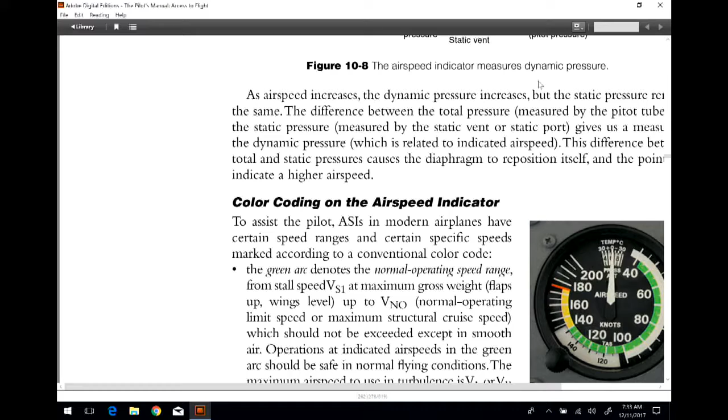So for instance, when we look here at the green arc, remember the green arc here in this... can I get that a little larger? How do I do that? Hang on, zoom. I don't want to do it that much. That's going to be just a little much there, I think. Yeah, dang it, I'll fix that later. I thought I could zoom in on that, but I can't, can I?

Just remember that the green arc, anytime that you see that on an airspeed indicator, refers to VNO, which is going to be your maximum structural cruising speed. It is the normal operating range with your aircraft in a clean configuration.

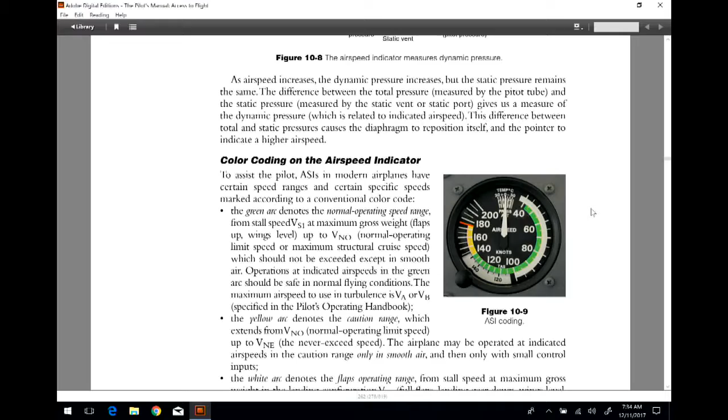However, it's just not as easy as saying VNO is the normal operating range; it is the structural cruising speed. So the thing you're going to have to learn is all of those V speeds. You have a chart down there that shows you those V speeds, and I think I showed that to you one other time. You're going to need to know what those V speeds stand for.

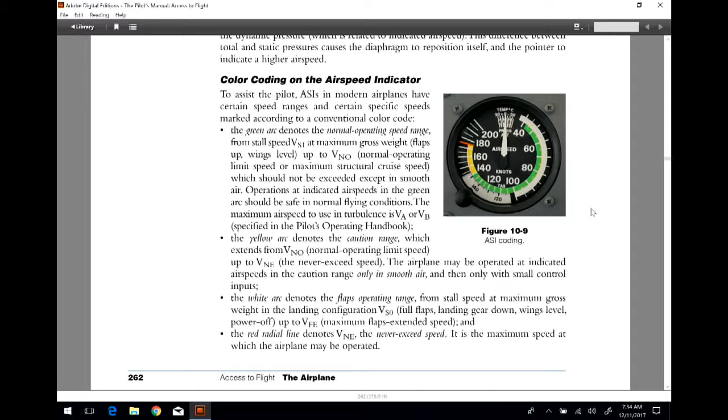So what VS1, VSO, VNO, VNE, also VA — or depending upon which aircraft you're flying, something called VO. It's going to be something that we call maneuvering speed. Maneuvering speed is that speed at which, when we start getting bounced around in the airplane, this is where VA comes in.

So in the mountains, clearly, we're going to have some turbulence occasionally. When that happens, and it starts to get just a little bit beyond the mild burble you get when you fly, when you start getting bounced around the cockpit, you're going to need to slow that airplane down. The reason you want to slow it down is because if you get a real big gust one way or another, it can put excess structural loads on that airplane, and when that happens, bad things can happen.

So slowing that airplane down gives you a greater margin of safety with regard to the structural integrity of your airplane. Oh my God. Structural. Stand by. Structural integrity of your aircraft. Goodness.

Slowing the airplane down will allow you to fly at what we call VA. The reason VA is not indicated on your airspeed indicator is because it is wholly a function of the weight of your aircraft — the heavier you are, the higher your VA indicated airspeed is going to be. Remember, VA is what we call maneuvering speed. Cirrus calls it VO, which is like operational speed, but Cirrus kind of does their own thing with stuff anyway.

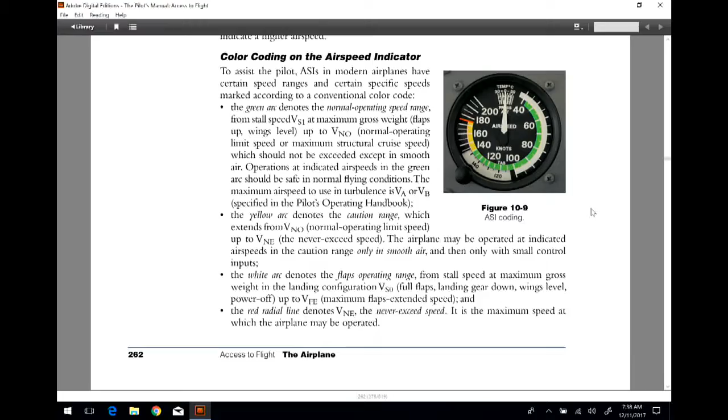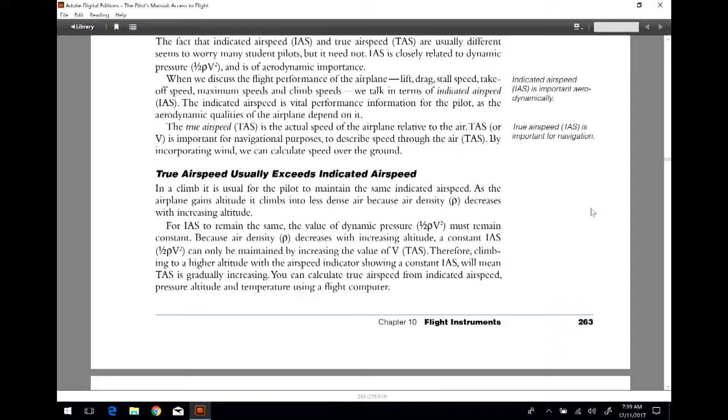We're going to go down here and look at some of these other things. I'm going to blow through the things we've already talked about: indicated airspeed and true airspeed, we've covered that. I'm going to go through this here also.

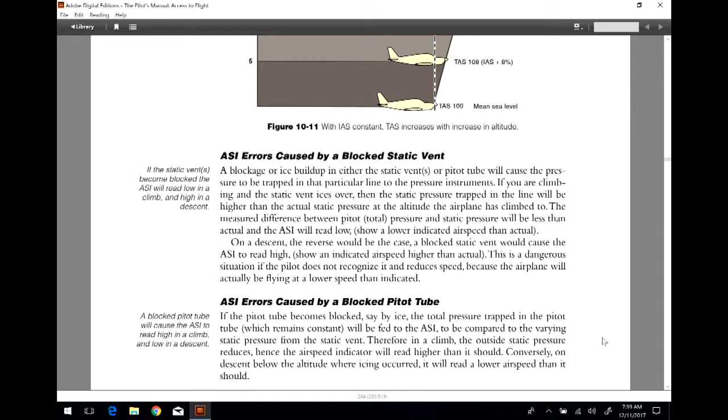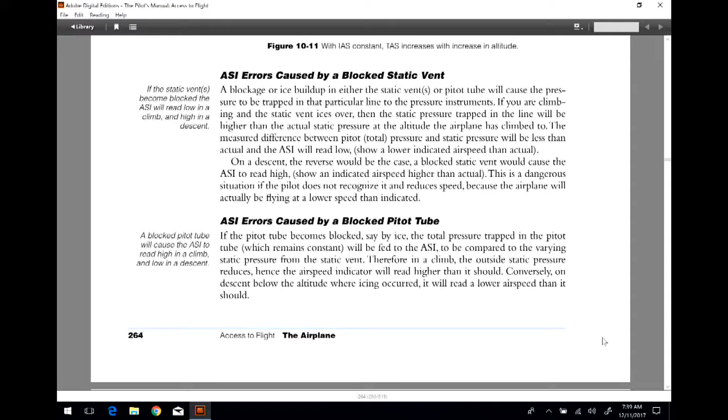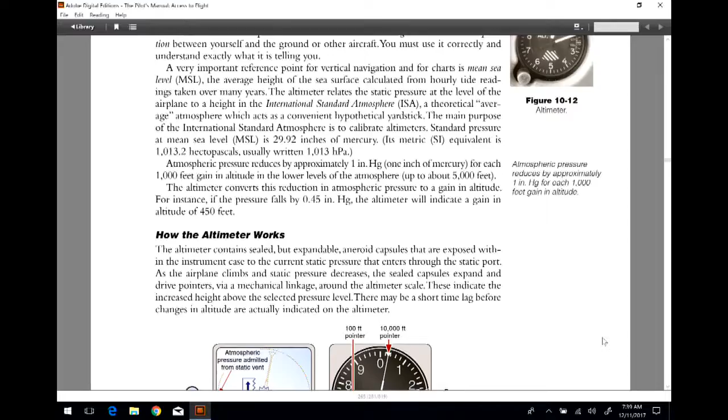Know what the errors are for your instruments, know what they're caused by, and make sure you know those. The altimeter - know how it works. Oh look, there's how it works. Know what the hands mean, know what they are.

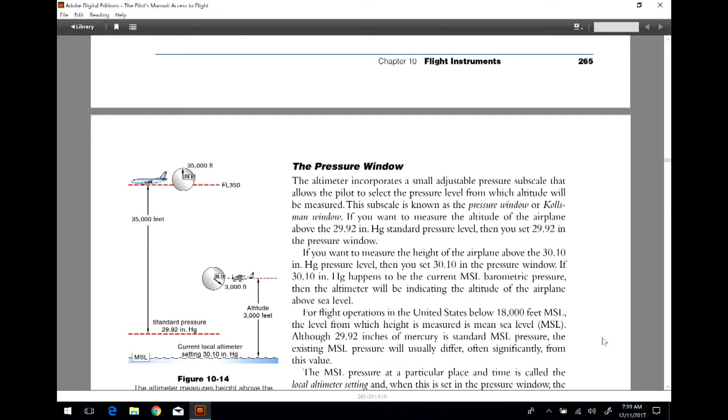The pressure window - and by the way, I misspelled Kollsman. I said K-O-H-L, I think I was thinking of Kohl's, like the retail store. It's K-O-L-L-S-M-A-N.

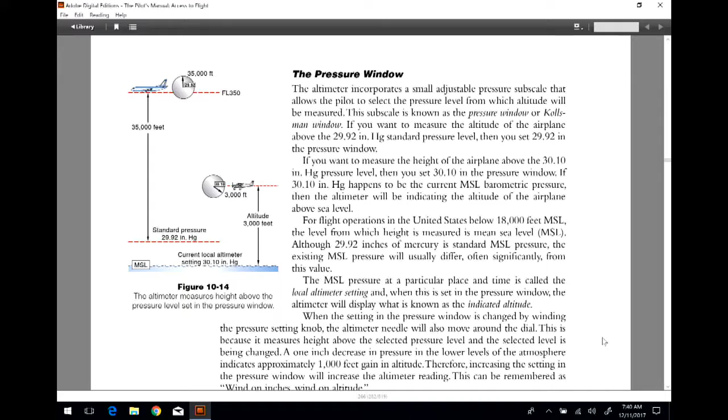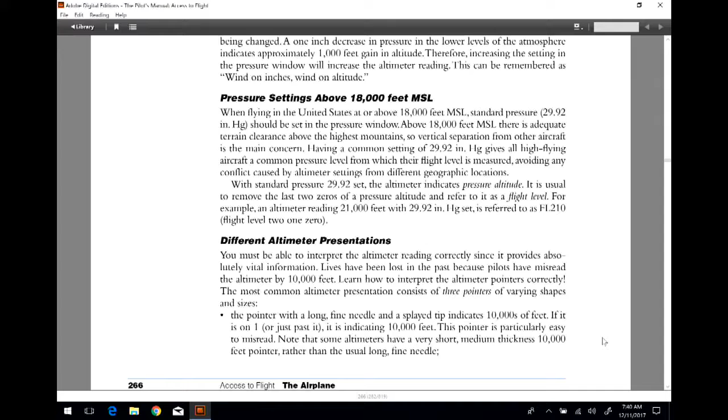Also know that we turn our altimeters to 29.92 when we're at or above 18,000 feet MSL, or what we refer to as flight level 180. The reason we do that is to put everybody on the same sheet of music.

When you're above 18,000 feet, guys, I'm having a rough morning speaking this morning here - so, 18,000 feet or flight level 180. Again, the reason we do that is because when you get above 18,000 feet, you're not going to hit anything. We're above all the mountains in the lower 48, and above all the towers and other stuff, so we're not going to hit anything up there.

And the problem is, remember me telling you that flying in the mountains, if you go more than about 10 minutes without changing your altimeter setting from another airport's reading, you should start getting a little twitchy, because it changes quite a bit. In Iowa or Kansas or somewhere like that, you may not have to change it as much, but your weather, especially air pressure, changes quite a bit in the mountains, primarily because of the orographic nature of the air as it moves over and around them.

So that pressure changes quite a bit, and you need to change it often. If you did that flying over these things at high airspeeds at flight level 180 and above, you'd basically have a guy just sitting there twisting that knob all the time, and that's just not practical. So to put everybody on the same sheet of music, 29.92 - that's it. We take the little variations we have flying through the air mass, because as long as everybody is on that page, the aircraft altitudes will all stay together.

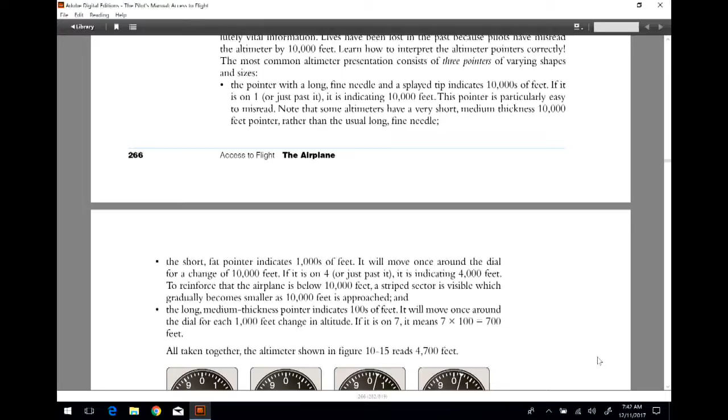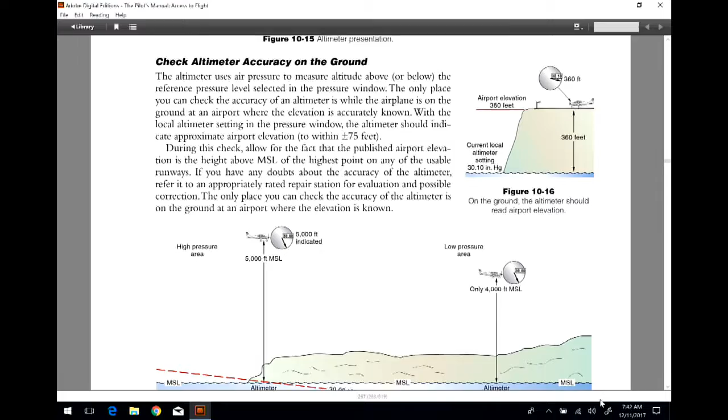All right, there's more presentations of this. Check the altimeter accuracy on the ground. Normally, what should happen is that when they give you the altimeter setting, like in Aspen, you should be within plus or minus 75 feet of the published altitude for that airport with that given altimeter setting. So you need to check that also.

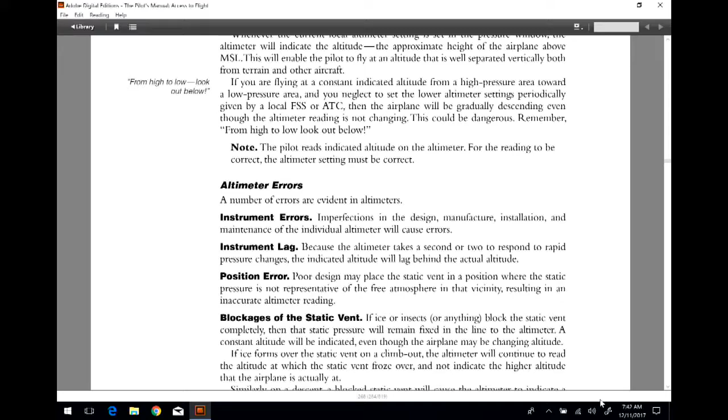Now, they call these things altimeter errors, but this really is not an altimeter error. Think about what I said about flying at flight level 180 and above, and how we take those little given changes in the air masses with regard to pressure. That's a little tougher to do when you're closer to terra firma, especially in our part of the world. So keeping that altimeter setting correct for your specific locale is extremely important.

Because if you think about the way an altimeter works, with higher pressure, that little squeeze box inside is going to get smaller. With less pressure, it's going to increase. So we have to think about this flying from one air pressure mass to another. And this is where they come up with the expression, high to low, look out below.

Because what will happen is that if you do not change your altimeter setting and you fly from an area of high pressure to low pressure, your actual altitude will be lower than your indicated altitude. You will think you're up here, but actually you're down here. And that could be catastrophic, especially in our part of the world.

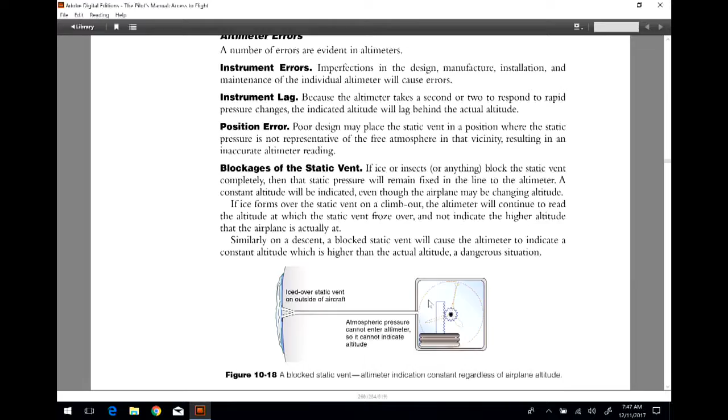You can look here, find out what happens when you have static vents blocked. Remember that you also have an internal alternate static source inside the airplane, so that in the unlikely event that your pitot tube and your static vents all become blocked, you can open those lines up at least inside the cockpit, and that's going to help you.

I'm still showing live here. I'm sorry guys, I'm just looking down at this thing and I'm not sure why it's doing this, but I'm showing that we're live. I am praying that that's the case. I hope we have not lost our thing here. Yeah, thing, that's pretty articulate. I'm looking here guys, and again I'm looking at this thing, and I don't know why it's searching for devices on this network. There it is. It's still showing that it's live, so we're just going to pretend that it is.

Yeah, so there's that. I don't have a good place to put that. Shoot. All right, isn't this fun?

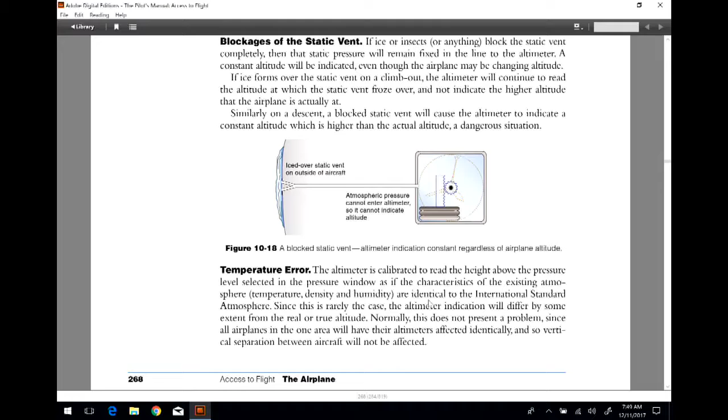In the unlikely event that the static lines get all blocked up, you can still open up those static lines inside. Now that's not going to take care of your pitot, because your pitot tube is outside, and you should have turned the pitot heat on prior to entering any visible moisture. And visible moisture, of course, is called a cloud.

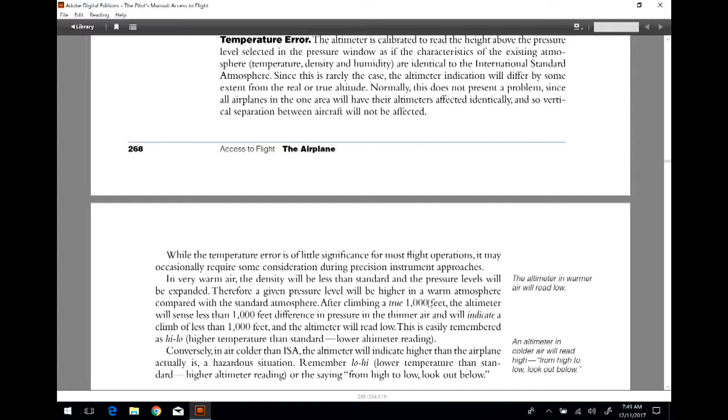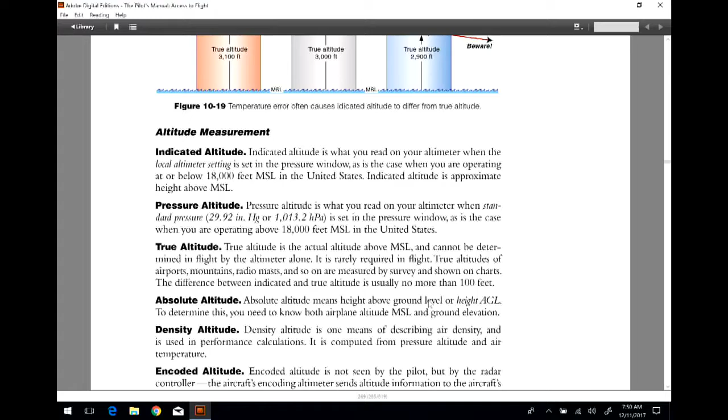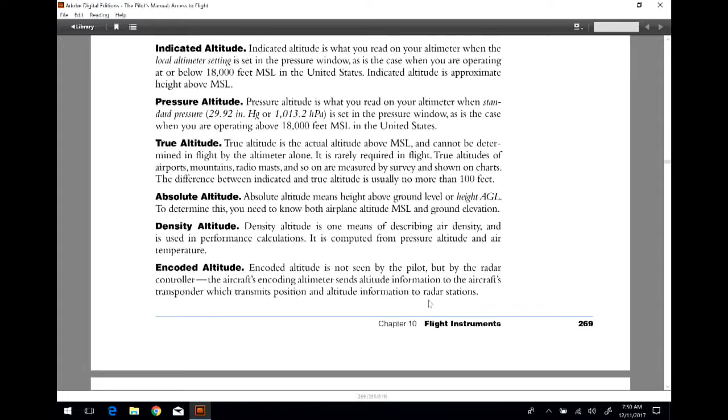Temperature errors: when we look at this, if you think pressure can cause a different reading, you would think temperature can too. Where temperature really comes into play has to do with really, really cold weather. And that cold weather is also why we have a special advisory for operations into airports where the temperatures are really cold. When we get to the instrument side of things, I will show you that and why that works. But understand how all of that stuff plays out.

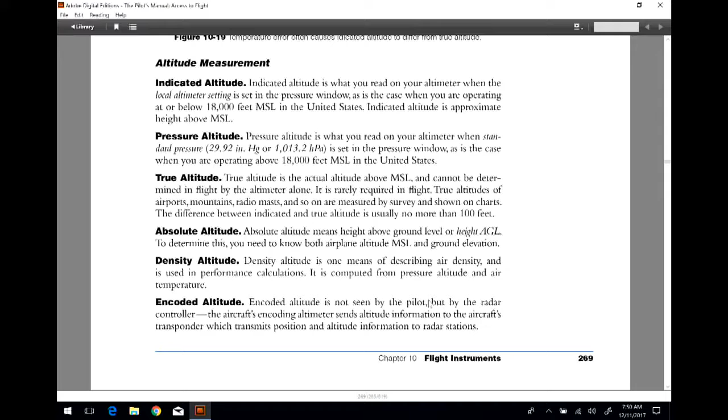Understand your altitude measures. Know what indicated altitude is, pressure altitude, true altitude, absolute altitude, density altitude, and encoded altitude. Know what those are.

Vertical speed indicator, as the name implies, gives you an indication of the rate of your vertical speed, whether you're going up or down. And it works similar to an altimeter, with one exception.

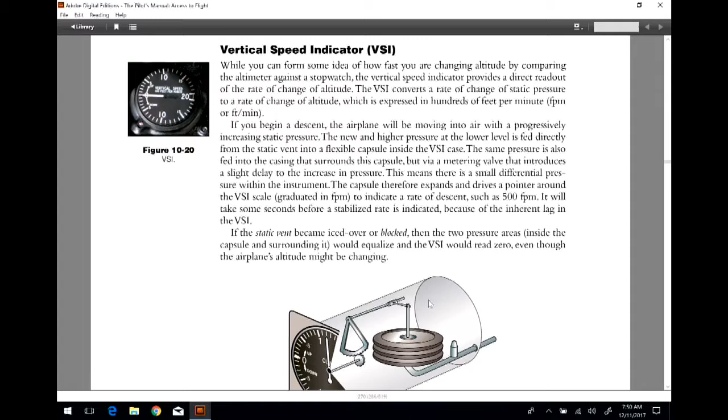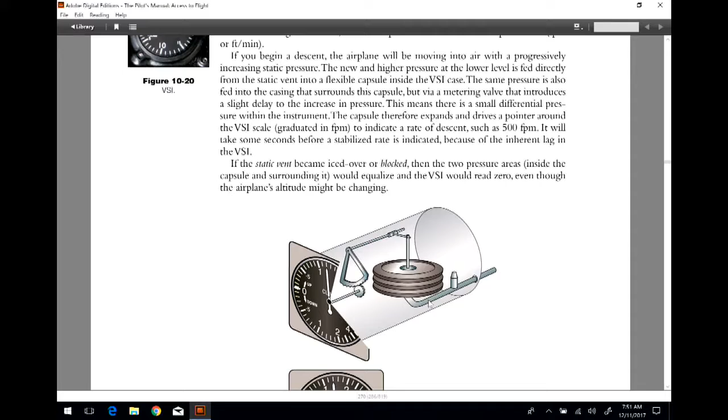The altimeter has a closed case with the static lines connected to the back. The vertical speed indicator has in the back of the case a teeny hole, a little bitty hole that creates what they refer to as a calibrated leak coming out the back. Without that little hole, you'd essentially have two altimeters, and while two altimeters may not be a bad thing, it's not going to give you a measure of your vertical speed. That little hole creates a delay that shows you when you're climbing and by how much, or when you're descending and by how much. So that's what the vertical speed indicator does, along with that calibrated leak.

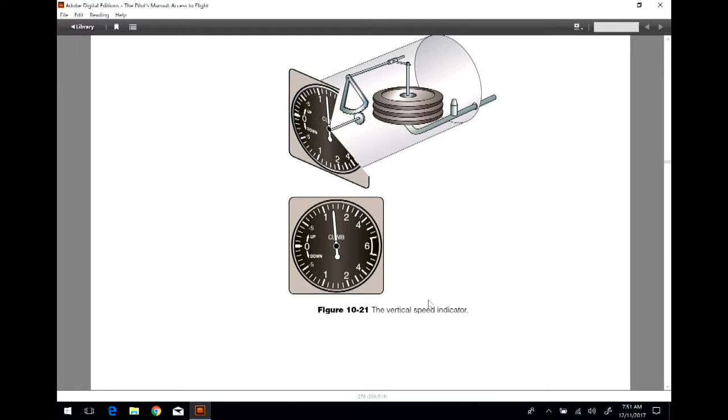Now, let's say all of your static lines become blocked, your pitot heat is blocked, your pitot tube is blocked, and your alternate static doesn't work. You just wrench the handle off of it or something, who knows. What would you do? You can't open up anything. Here's what you do: you break the glass of your vertical speed indicator. Think about it. If you don't have a sealed case, you're opening up this vertical speed indicator to the ambient pressure inside the cockpit. Your vertical speed indicator is not going to work, but what would you rather have, an altimeter or a vertical speed indicator?

I'll take the altimeter, thank you very much. And the reason you break the glass on that is to open it up to the pressure inside the cockpit, and it is the least expensive of the pressure instruments to replace. So that's why you break that one. So in the event of emergency, break glass.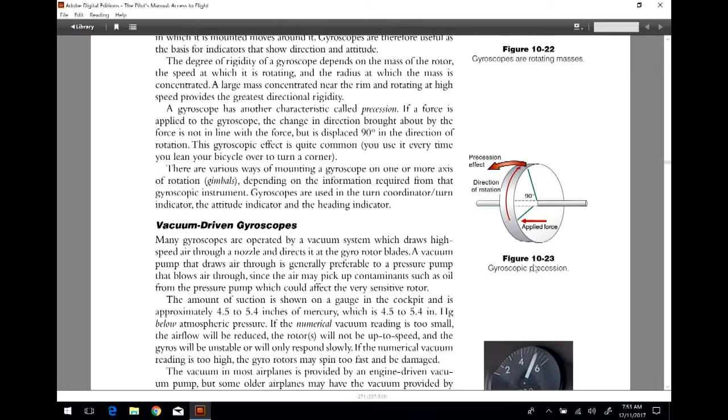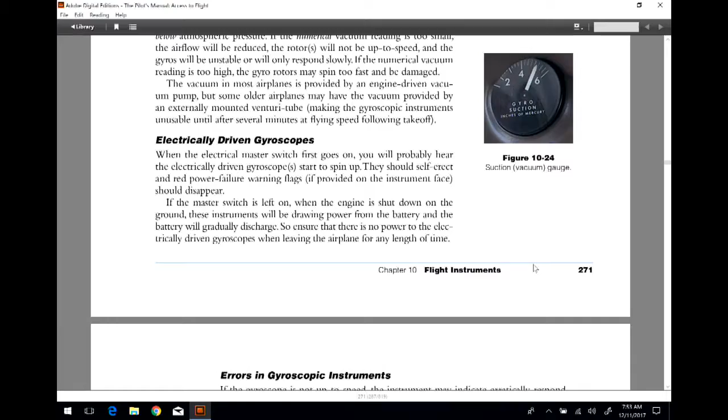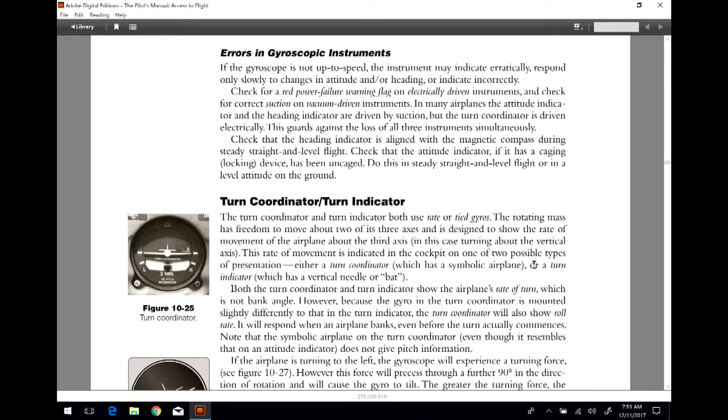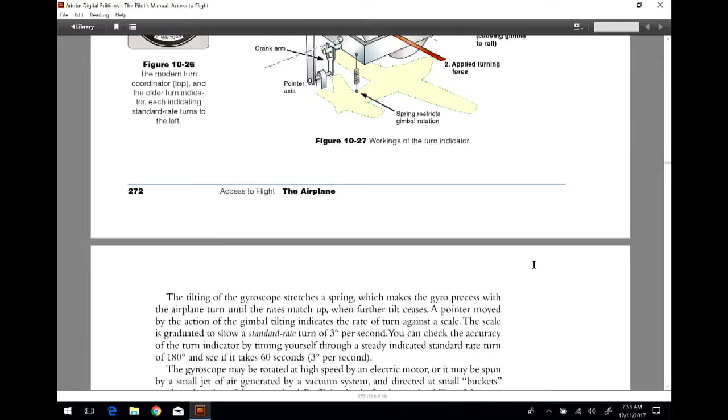Most of the older ones are driven by vacuum pumps, which blow air over the vanes on the edges of that thing. A lot of them now are electrically driven. The big thing has to do with failure of that thing to keep spinning. Once it's spinning, it's going to show correct instrumentation. But if you have a power failure or a vacuum pump failure, that thing will ultimately start to spin down or begin to slow down. When that happens, the indications on your gyroscopic instruments may be faulty. So that's kind of how that works. You can look there at your gyroscopic instruments, you'll see what that's all about.

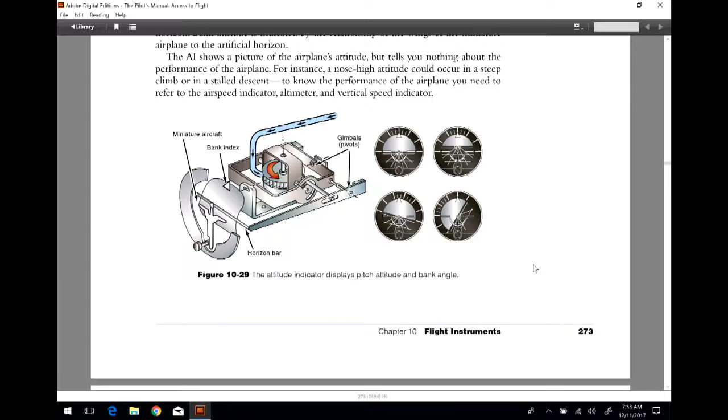What is the alpha and the omega? Oh, that is correct, it is your attitude indicator. Understand what the attitude indicator does for you. Understand how it works.

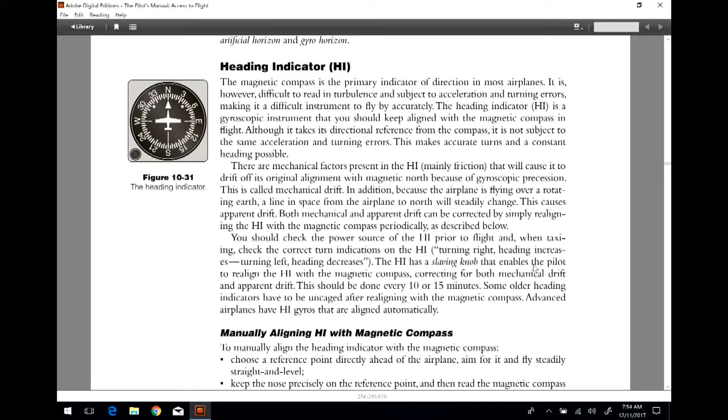Heading indicator - that's another gyroscopic instrument. Understand how that works. Know that periodically, we used to have to, every 10 to 15 minutes, manually change the heading indicator because it wasn't an electrically driven instrument, so you'd have to slave it to your actual wet compass up on your glare shield somewhere. Normally they mount those away from your other instruments so the electronic fields don't interfere.

The new ones we don't have to do that with because they're electrical, driven by the computers, and they also pull data from other sources. So that's how that works.

Also know that whenever you have navigation information overlaid on top of your heading indicator, we call that an HSI, a horizontal situation indicator. HSI is navigation on top of your heading. Okay, so there's that.

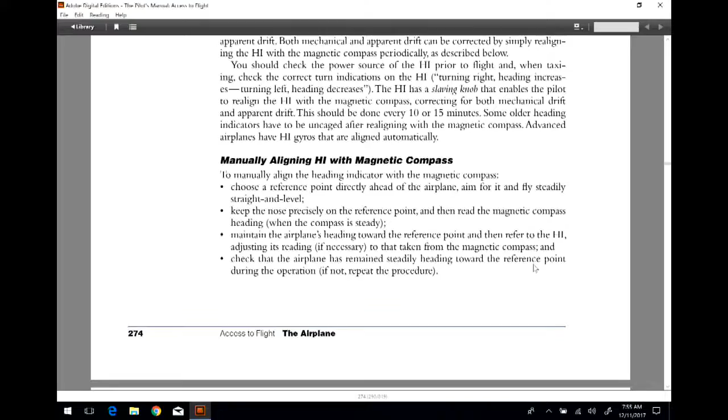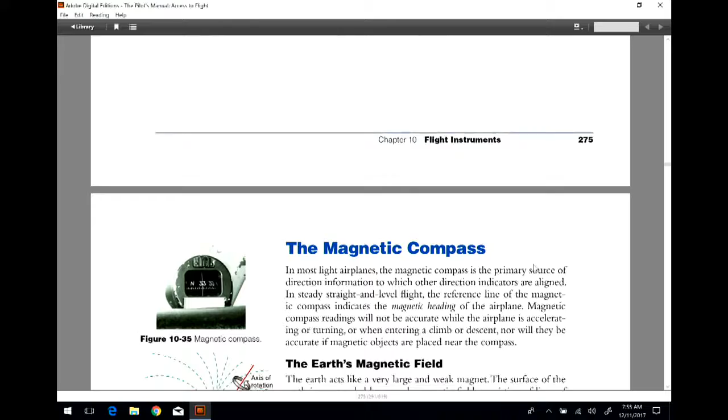And this, the inclinometer, turn coordinator - you know how that works. Look at this, know that all of that stuff works. The magnetic compass - this is the wet compass, or the old whiskey compass, as we talked about before.

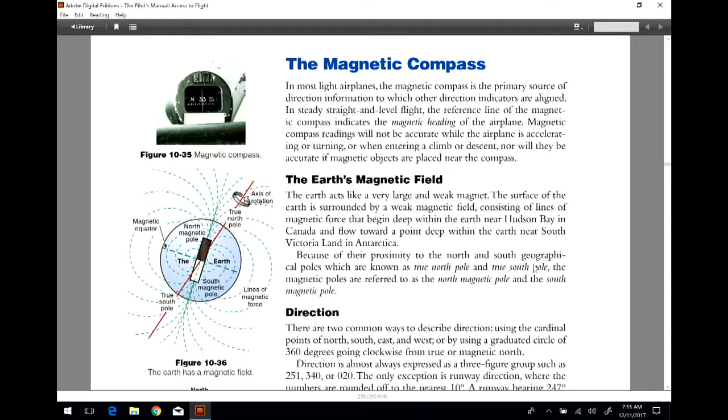We use the magnetic flux - these isogonic lines around our atmosphere, which, by the way, the magnetic field around our Earth is why we have an atmosphere. So for right now, most all of the things we do are based on true north and magnetic north, using our magnetic field here.

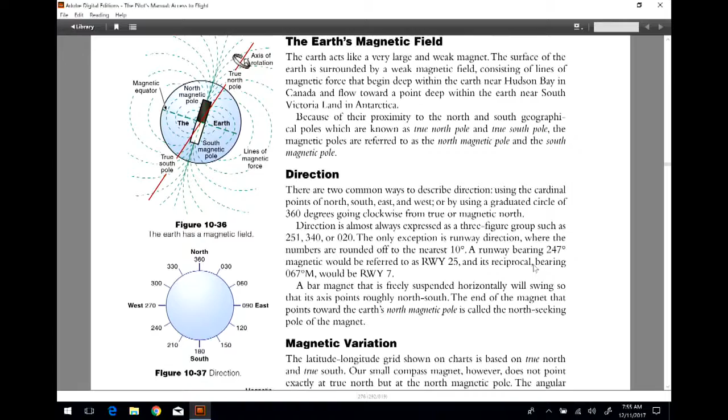We also understand there is a difference between true north and magnetic north. True north is geographic north. If you followed a line of longitude to its terminus at the top of the world, that's geographic or true north. But magnetic north and true north are not geolocated - they are in separate places. The North Pole, where Santa lives, is geographic or true north.

Magnetic north is over some lake in northwestern Canada right now, moving toward Russia at about 32 miles a year. So it wanders around a bit. Some scientists say that perhaps within your lifetime, the North and South poles may switch. That's kind of one of those things that happens periodically, I'm told, in the Earth, as that molten core creates this magnetic field, and this thing moves around from time to time.

Just know that true north and magnetic north are not in the same spot. So when we break down things with regard to navigation for our airplanes, we have to break it all down to magnetic north. The reason we use magnetic north with the wet compass is because everything else can fail - it's rare that your whiskey compass could actually fail. So navigationally, we break everything down to some form of a magnetic course, a magnetic heading, so we know which way to point the airplane, and then we adjust for wind.

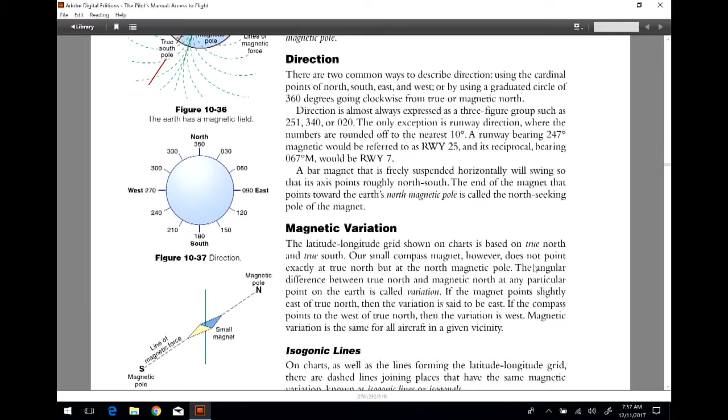So when we see something here like 10 degrees east, what we'd do to make that adjustment between magnetic and true is subtract 10 degrees from our true calculations to get our magnetic calculations. On a westerly line of flux, or isogonic line, we would add that to our true calculation to get our magnetic.

west of Tampa. That line right now is right here - it's just west of New Orleans. So it moves around a bunch. And you're thinking, wait a minute, aren't the lines on the runway painted to line up magnetically?

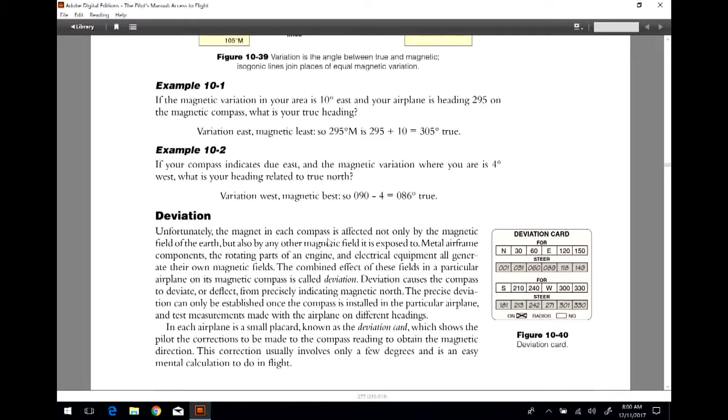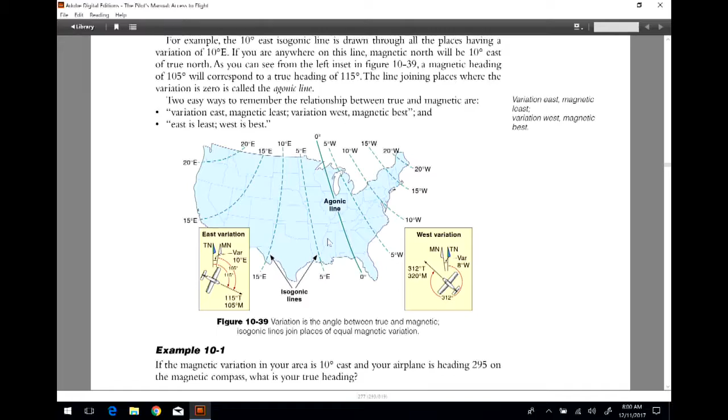So, know the difference between isogonic and agonic lines. We would refer to this as magnetic variation. Magnetic variation is the difference between the position of the isogonic lines as it relates to true north. But we have something else called magnetic deviation. Magnetic deviation does not happen out there on the great big world. Magnetic deviation happens inside the cockpit.

So think of the pilot as the deviant. Okay? Think of the pilot as the deviant. And in that, you have a card that will be somewhere either above or below your magnetic compass. It shows the deviation between the reading that you get on the compass and what is actual. The reason that you get some of these changes is because of the magnetic interference of the flight instruments themselves inside the cockpit, changing the way that your compass works inside that airplane.

So for instance, if you look here at the deviation card, to fly north, you would steer 001. Remember, north is going to be 360 or 000. East, which would be 090, you would steer 089 to make that work. Most of these deviations, honestly, are only going to be a degree or two. What's a couple degrees among friends? Well, as a professional aviator, which is your mindset, you want to be precise. So this is the way that we do it, okay?

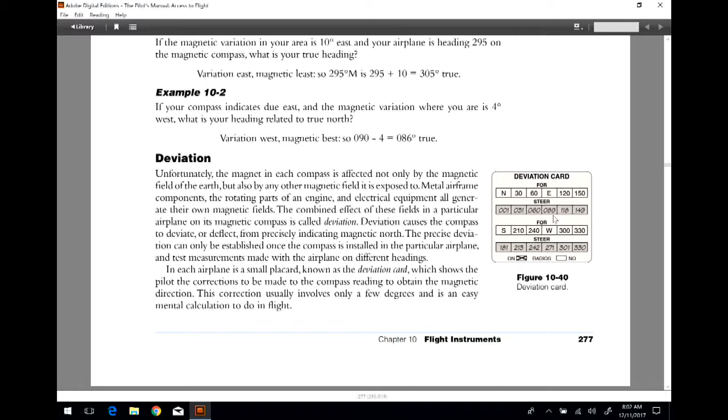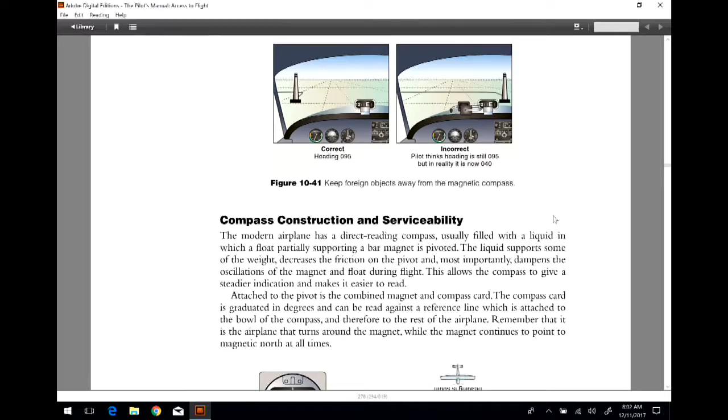Magnetic deviation gives you your deviation card or compass card, okay? Shows you a couple of things there, shows you how the compass is constructed, how it works. They occasionally have to spin that compass and do these serviceability checks. We check those things. They can be bench tested. The avionics shops can do it.

In fact, what they're doing to my airplane right now, because I use cameras inside my airplane and I have one camera that's relatively close to that compass, they're actually having to spin the compass to give me another compass card because of the potential interference of that camera that's up there near that compass. So that's kind of why they do that.

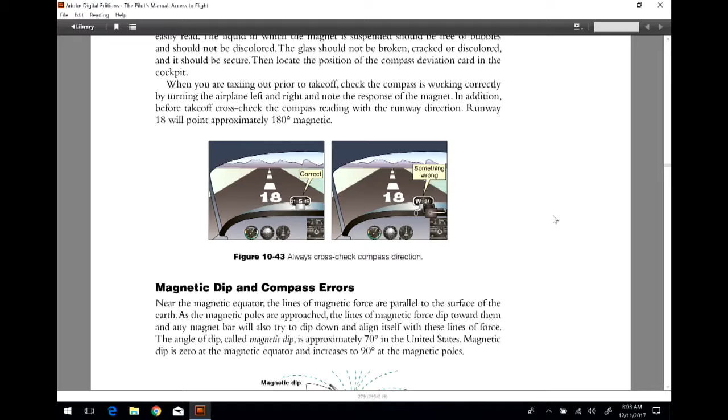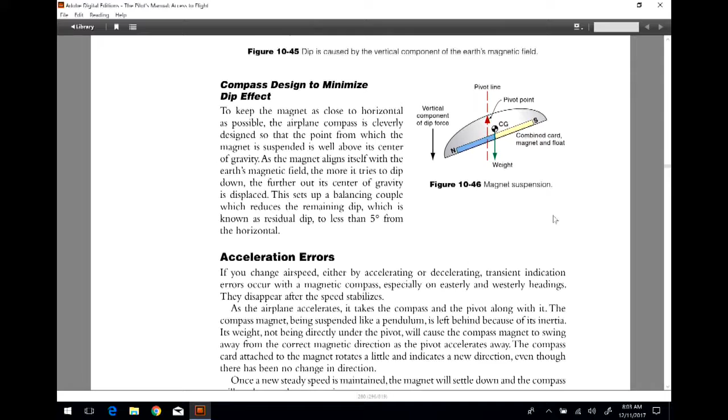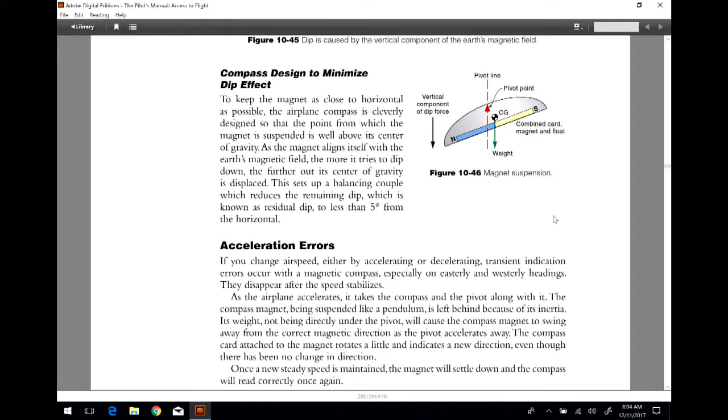Magnetic dip and compass errors, here's the thing. We have two different compass errors, and with those, we are going to have acronyms. So, acceleration errors. I want you to write down vertically ANDS. A-N-D-S. ANDS stands for accelerate north, decelerate south.

Here's what happens. If you are flying on a general heading of either east or west, and you accelerate or decelerate your airplane, that magnetic disc sitting in that pool dips and moves around a little bit. When you accelerate, it will show a momentary turn to the north. When you decelerate, it will show a momentary turn to the south. So again, don't follow it. Don't change your heading based on your compass when you are on an east or west heading and you are accelerating or decelerating.

Accelerate north, decelerate south. Well, Mr. R, if that happens on an easterly or westerly heading, is there something that comes up if we're heading north or south? Excellent question, imaginary student. If you're flying north or south, there is another error that is possible. And we call this UNOS, U-N-O-S, write that vertically. Undershoot north, overshoot south. Let me take you through these. The acceleration errors, they talk about this right here. There's the ANDS, okay?

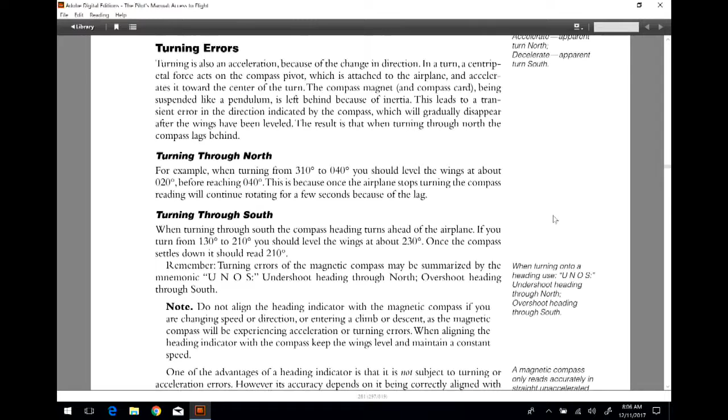Here's the turning error. The turning error is the fact that when you're going north, that's when that compass wants to run home to mama, okay? That's when that needle is sitting north. Well, you start to make a turn away from north, and the compass kind of wants to stay there. It kind of wants to stay at that northerly indication. And so it will lag behind your turn.

When you're heading south, and I don't want it to look like I'm making some form of proclamation about heading south, that's necessarily a bad thing, okay, just so you know. So when you're heading south, as you turn either left or right from that heading of south, that compass will actually lead your turn going either direction, coming in a southerly heading.

Overshoot north, undershoot south, okay? Undershoot north, overshoot south. Undershoot north, did I say that right? God, I don't know. Stand by. Oh yeah, okay. So when we do that, turning from that southerly heading, the compass is going to want to go faster than you're turning for just a little bit. It's not going to be anything crazy, but it's going to be a little bit.

Here's where this comes into play. When you are learning your instruments, you are going to learn how to make standard rate turns. Standard rate turns mean that you're turning that airplane 3 degrees per second. That means that in 2 minutes, you will turn that airplane in a 360 degree circle, okay? So you'll go 180 degrees in 1 minute, 90 degrees in 30 seconds. In 15 seconds, you'll go 45 degrees. Do you kind of see where I'm going here?

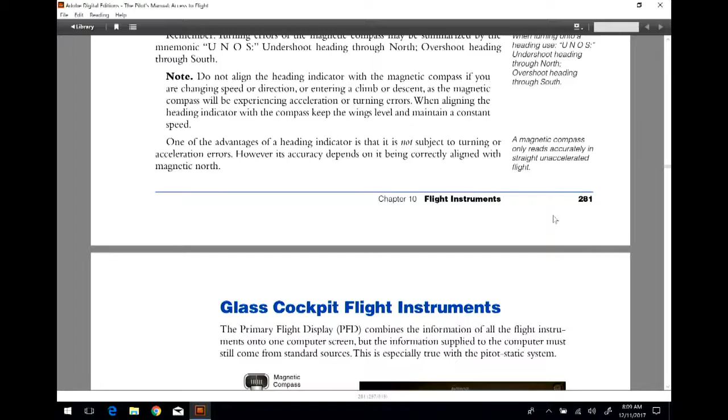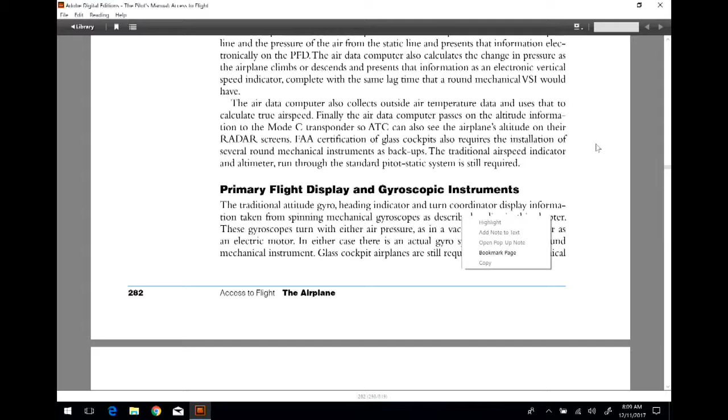There's that. Glass cockpit. We've talked about this before. You understand the nature of these things. The difference is kind of how they operate. We use air data computers. We use accelerometers instead of some of these other instruments, what we call MEMS, micro electro-mechanical systems, that operate in much the same way as those little hairs operate inside your vestibular tubes, inside your inner ear, for positioning, etc.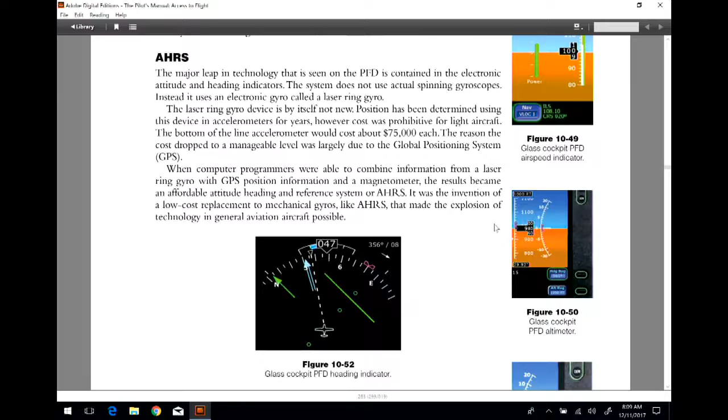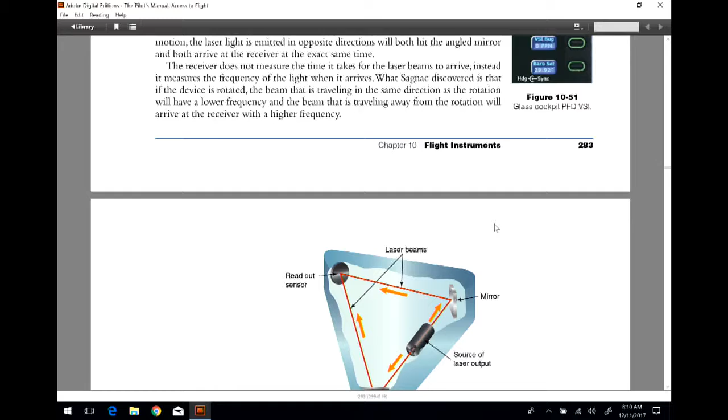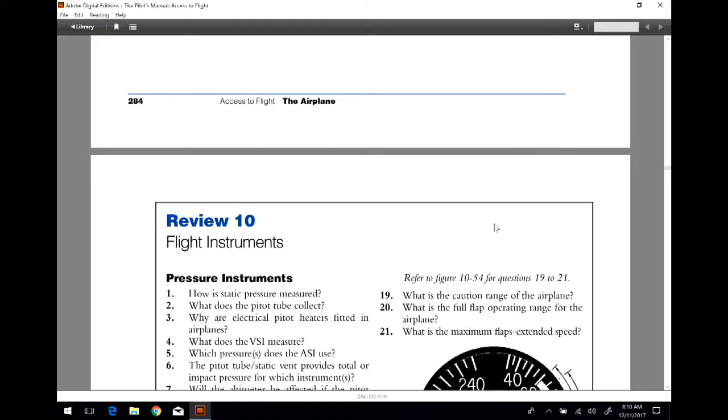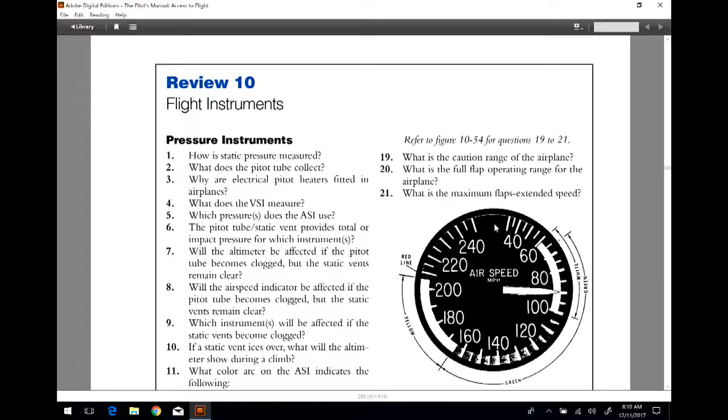So you can look here also at AHRS, attitude and heading reference systems. You have laser ring gyros now. We don't really have those much in our airplanes here, but we do use lasers in these. We use a magnetometer as opposed to the magnetic fields, and that's kind of it. You'll look in Big Blue and see what questions there are with regard to instruments, but that's it. Guys, if you know those things right there, you will be ready for this quiz tomorrow.